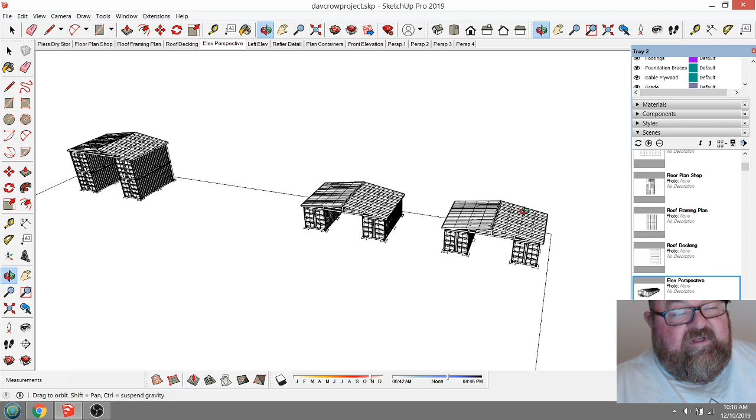And usually the buildings I was helping him with were temporary anyway. So the reason I'm explaining this is because I can't just sell any of these packages and these drawings the way they are for other people, and I'm going to explain that. But I think that's a bad idea in general, because each project really should be designed independently, for that particular project. It's a bad practice to start kind of rubber stamping drawings and design for different projects.

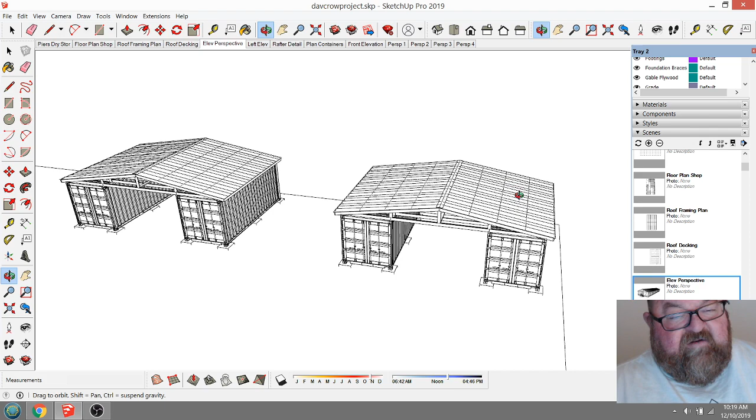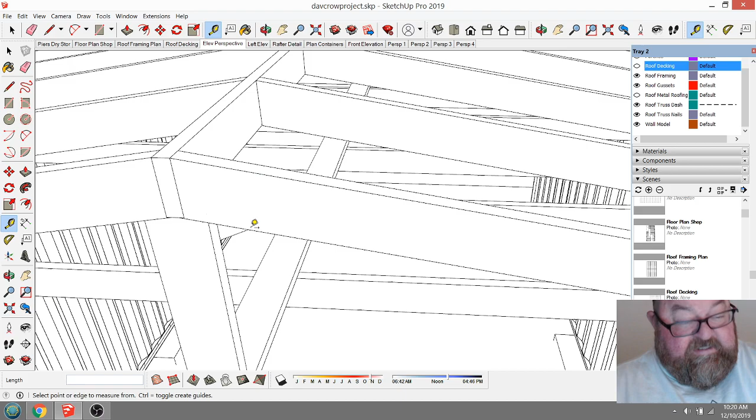And let me go in and turn off my metal roofing and the decking. The Army, on this particular project, would get these containers of 16-foot material. So they didn't have any choice, right? This container would come with so many 2x8s or 2x6s 16 foot long, and that was it. You just had to deal with it. So what I did was I took a 16-foot, I think these are 2x8s or 2x6s. See, that even makes it worse. And I stretched it out as far as it would go. You can see that's 16 foot exactly.

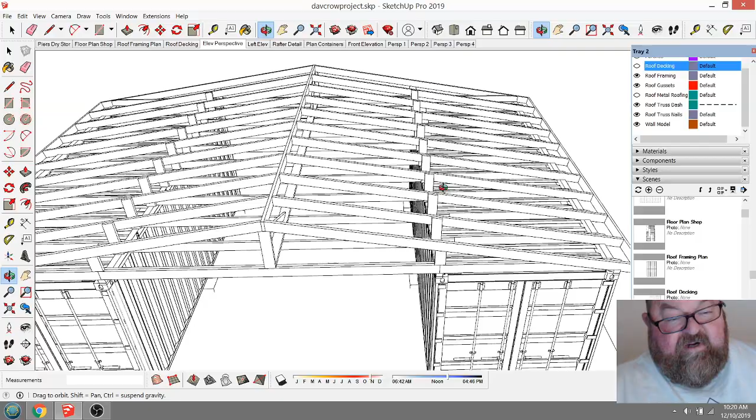So the idea would be that I made the pitch low enough, and I think this is like a 2/12. I made it low enough so that the rafter would be long enough. And the reason I knew I could get by with that is because I had this bearing point midway on each rafter that I could put this little stiff leg in, and I knew then the rafter was really only spanning about half that distance.

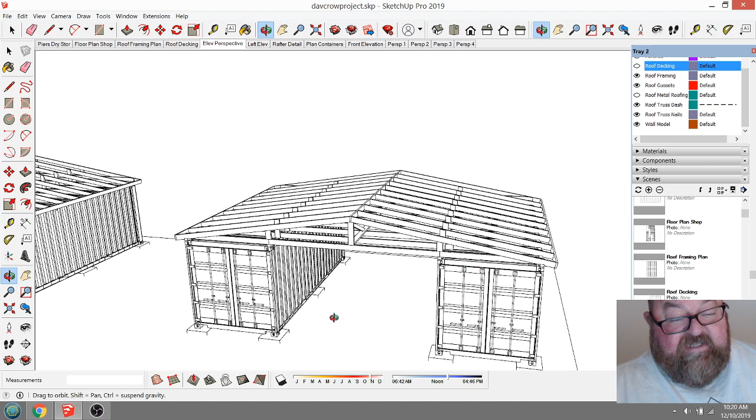But what I didn't like about it was this little wimpy overhang that they had, as a result of only having 16-foot material, because they had to have 14 feet between here to get their trucks, I don't know if they were using Humvees or what, in here to work on them. And that was the whole point of this. So this is not a good design for a civilian. These weren't even good designs for the military. It was out of necessity.

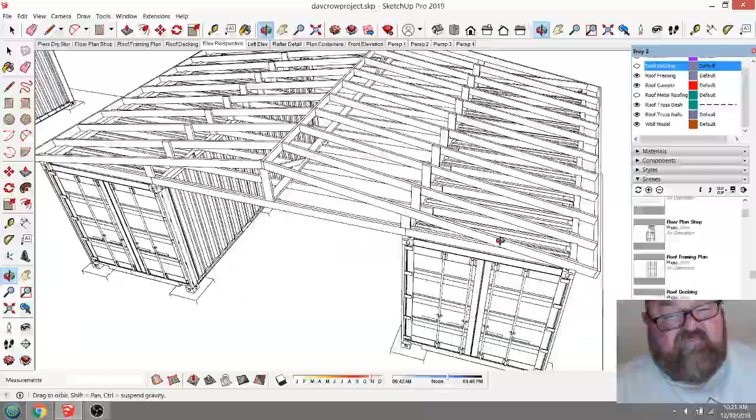Now I think it's a good design for what we had to do, and it worked. But it wouldn't be good for civilian use, and that's the reason I'm not being obstinate by not selling people these designs. I'd be happy to. It's just I have a conscience, and it's just not a good idea.

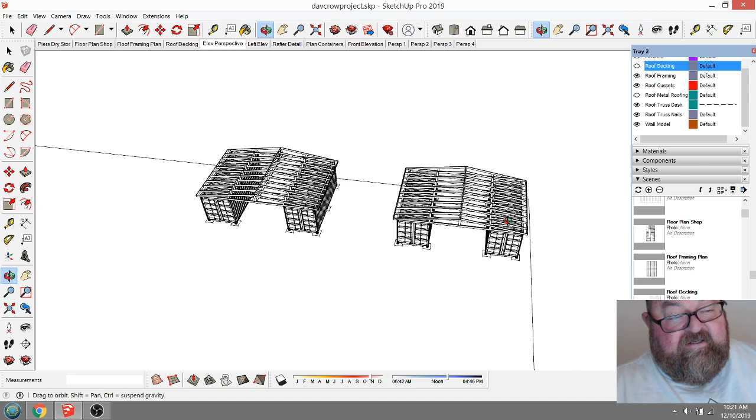I'm going to show you a better design, and this one was really hairy to me. They would stack up two containers, and I'm not sure if this was because they were trying to put a howitzer in there or what. I only got the information I needed to have. These things were top secret missions, and I didn't get any of the top secret information. So whatever they were putting under here was tall, but this is very precarious. And I told Chief, if you ever have a big wind come along, it's going to rip this thing right off.

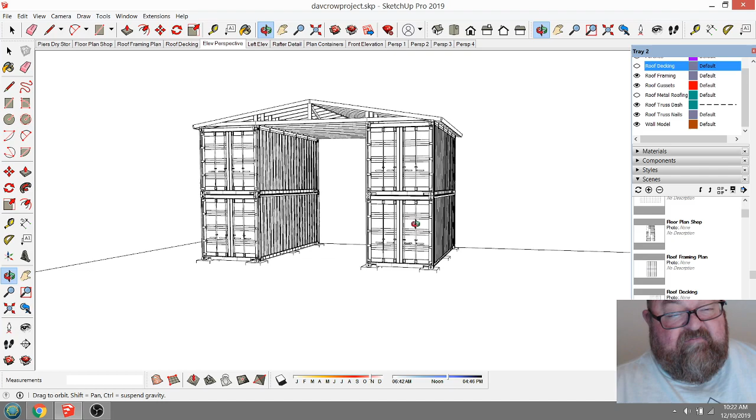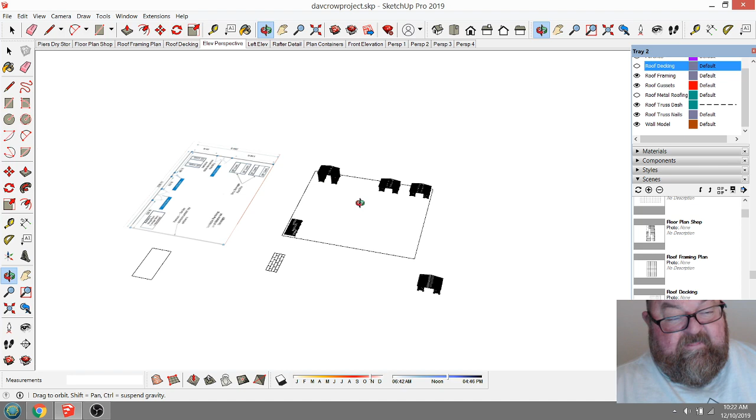And that's the other issue, is that since these were temporary buildings, we had these fastening methods, but I never knew if they were going to be carried out. So I'm basically going to delete all of this. Let me fix this style so you can see better. Which one do I like? There's a certain one.

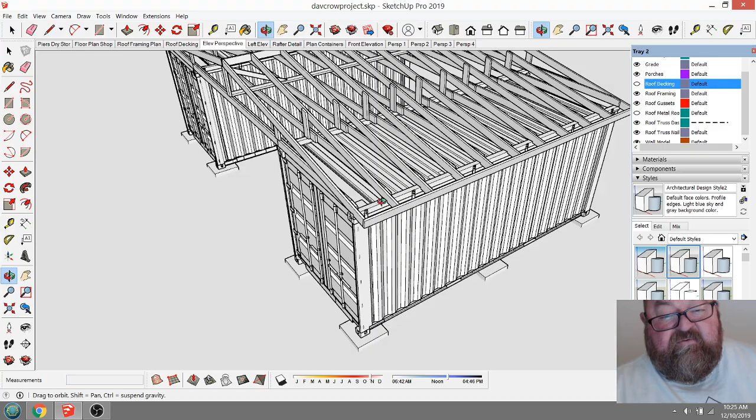I think David said his was not going to be on a slab, but you'll have to have these bearing points, because I still question the load bearing capacity of these walls. These are basically just corrugated steel, and there's no structure on the inside of these. And I know people are going to say, "Oh, they're really strong." Yeah, they are, but you need to have points along here that are load bearing. I would say at least one on a 20-footer. You should have one in the middle. I wouldn't be spanning this.

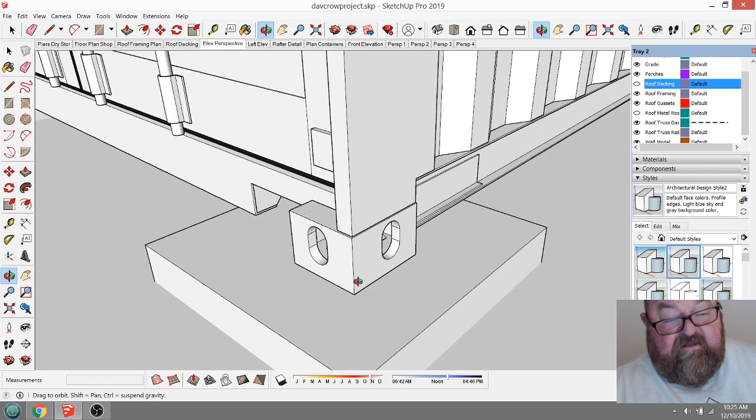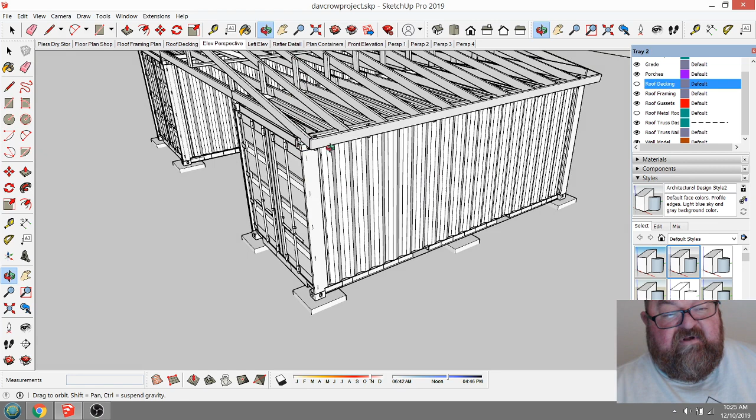The way these are designed is that the corners are what's load bearing. People get this mixed up. See all these locking points? When they're stacked up, the load is transferred to the corners. It's not spread out along the length of it. Of course, the length of it is only carrying what is in its container. When you start stacking these up, it's just the corner that's taking the weight from the one above it. So it's not like this is designed to have 20 containers stacked on top of it.

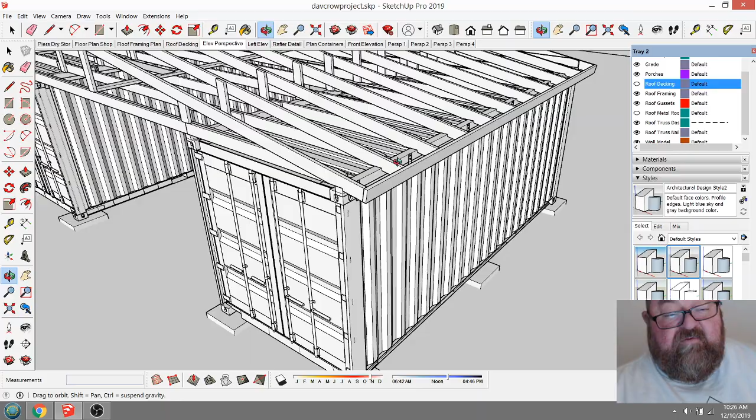This part of it is designed to be stacked, because if you'll notice up here at the top, these stick up. So we're actually creating a load bearing condition when we put this 4x4 on here. Now we're creating a load bearing condition, but we're spreading it out over the length, so it should be fine.

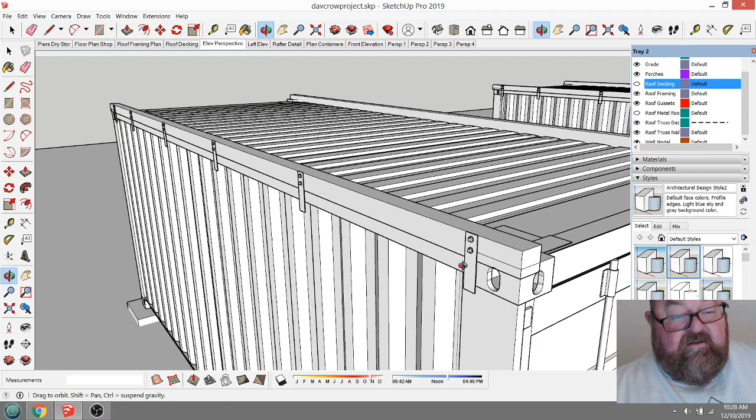So I guess I've done enough talking. So basically this roof is going to go bye-bye. So now we can see how these 4x4s are attached. You just weld on some kind of plate steel. I think this is like a 2-inch strap by 8 inches maybe. Yeah. So you can get some 2-inch plate, flat bar, like 1/8 inch thick, and just cut it into 8-inch pieces, and you'll have your straps.

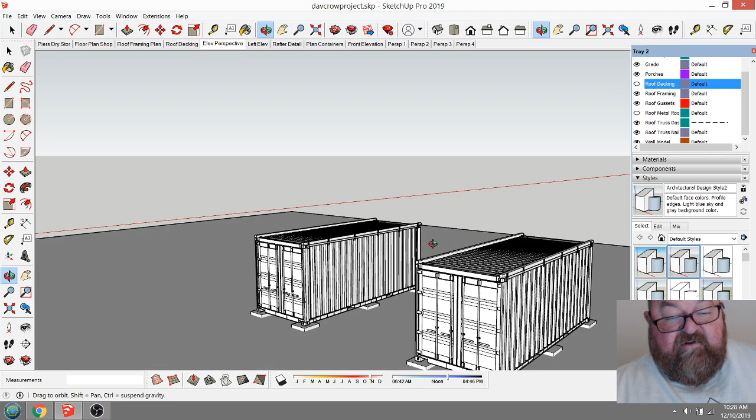Because this is a big airplane. Okay, don't be fooled by this. This roof is acting as a big wing, and if you have a big wing coming along, it's going to be lifting. There's going to be a lot of uplift. Okay, so if this thing's going to fly off, you want the containers attached to the roof as it goes. Maybe it'll land in an upright position somewhere.

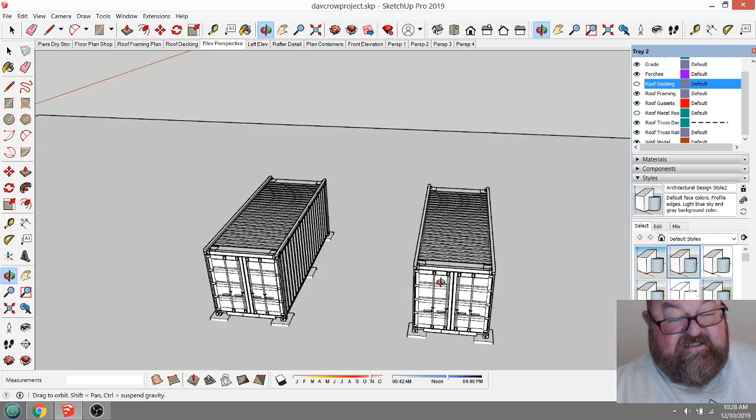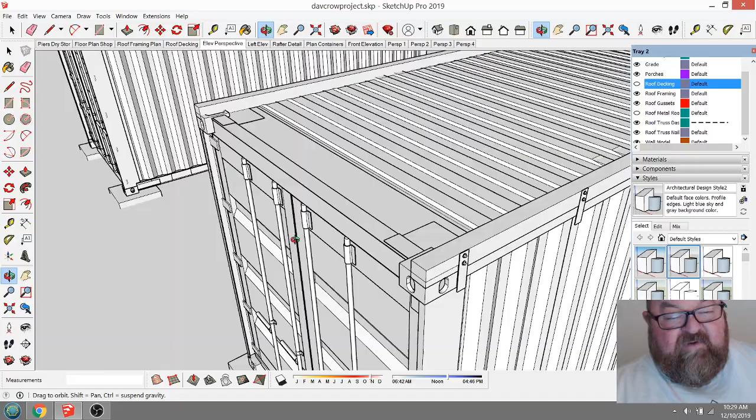But anyway. So we're going to start off with this, and I'm sorry about all the zooming I do, but you have to understand that I have to be able to see. I get all kinds of complaints about this, and I understand, because I watch my videos before I release them, but you have to understand too that I have to be able to see what I'm doing. What I am trying to do is get out of the habit of doing this while I'm talking, so I'll try to do better about that. But I just have to get things situated to where I can work. And this is all about working. The video comes second to me being able to do this efficiently.

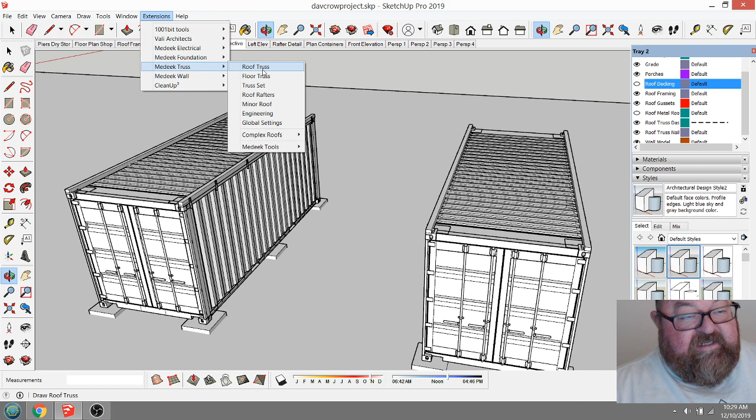So one thing I wanted to introduce in this video, I've used this before, is the Medeek extensions for SketchUp. They have some really nice ones. They have Medeek foundation, truss, and wall extensions. And of course, these truss extensions have actual engineering applied to them. You see a lot of these extensions in SketchUp that are just shortcutting the drawing function for you. Well, these actually have calculations, load-bearing calculations behind them, and these webs are all accurate. You could take this to a truss company and say, build this for me.

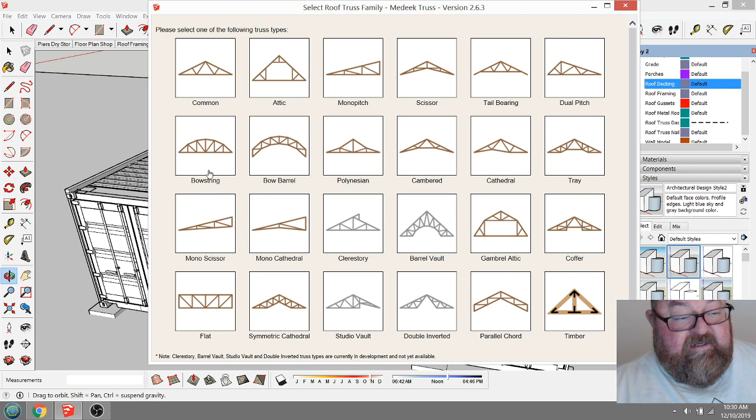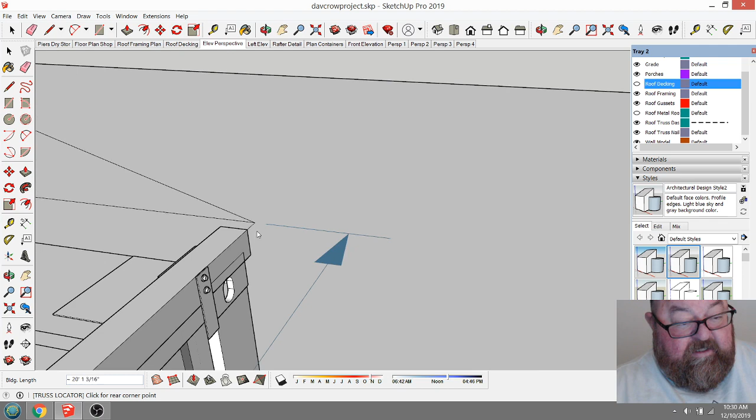So anyway, I'm going to just pick out this typical truss here, and I noticed that they don't have any. One thing I'm going to request is a drop truss, and I'll have to draw it, which is no big deal. But I'll show you that in a second. So I'm going to pick this one, and let's see, click front left corner. So I'm going to go from here over to here, and we're going to go back to here. Now, truss type Fink is fine. Let's see if they do have the drop. I'm just going to do a Fink. I think that is the configuration I was showing you.

Out to out span 30 feet. Now I think I like a 16-inch overhang on this size building. Let's see, top chord pitch. Let's go with a 3. And I meant to ask him about this. I think on this kind of building, you want to kind of keep. Let's see, we're gonna have a 15-foot. Sorry, I'm thinking out loud here. I've got a 30-foot span. That's 8 and 8. That's 16 and 30. That's right. Actually, I have a 15-foot span. So 15 times 3 would be 45 inches. If I leave it at 4, that's 60 inches. So you're looking at basically a little under 4 feet versus 5 feet. And we'll leave it at 4 for now.

That way, let's see. He said he was going to use metal though. Let's try to save him a little money. And if you don't like this, Dave, I can fix it. But you can easily do a metal roof at 3/12. I just think keeping the roof down. You wouldn't want to do like a 12/12 pitch. You don't want the roof area to be larger than the building area. That's kind of a general rule of thumb I have.

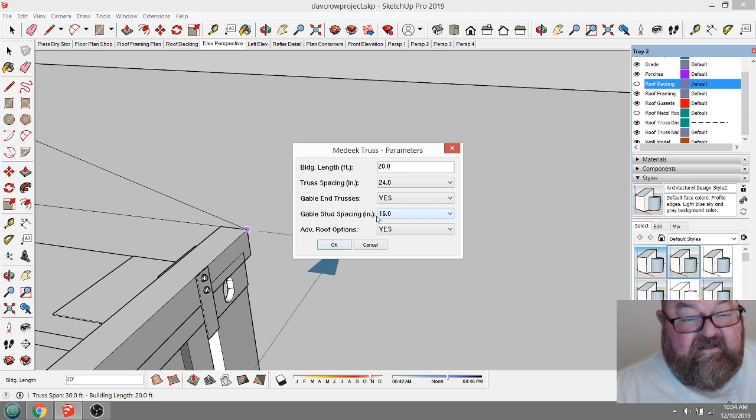The reason I want these gable end studs, and I'll show you this in a second, to be on 16-inch centers is because I'm going to suggest maybe doing some board and batten in the gable instead of lap siding, and those 16-inch centers will work out better for that. So let's see what kind of advanced.

This is on these outlookers. I like to actually drop the truss on the end, and I'll show you if they don't have that option. I'll just manually do it. Roof sheeting, let's go ahead and say yes. 7/16, good. OSB. Gable wall sheeting, yes. Wall sheeting material, OSB. Subfascia, yes.

Drop. Fascia width, yes. This is one thing about Medeek, is that they actually know how things are built. And I can tell by going through all these specs. 7/16 OSB, all of the stuff is common to modern building construction, and it's very refreshing to see that. Rake board, yes. Gable overhang 16.

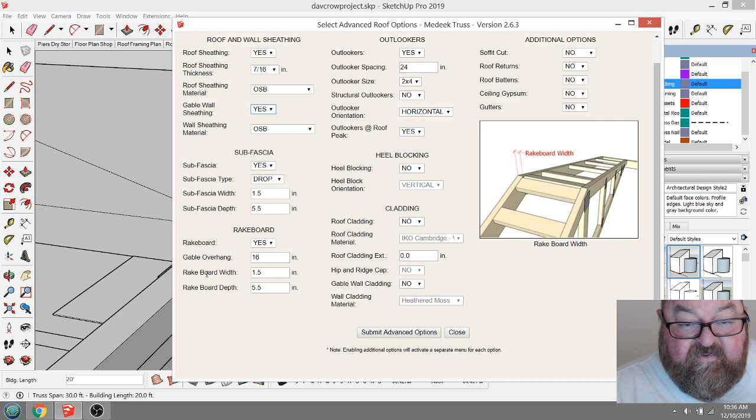We call it the barge rafter. The reason we call what they're calling the rake board a barge rafter is because it's the rafter that hangs over out past the house line, and it's just like a subfascia. It's akin. It really is part of the subfascia system. It's not like an exposed member. It can be, but it's not typically exposed. It's usually covered up with a fascia board.

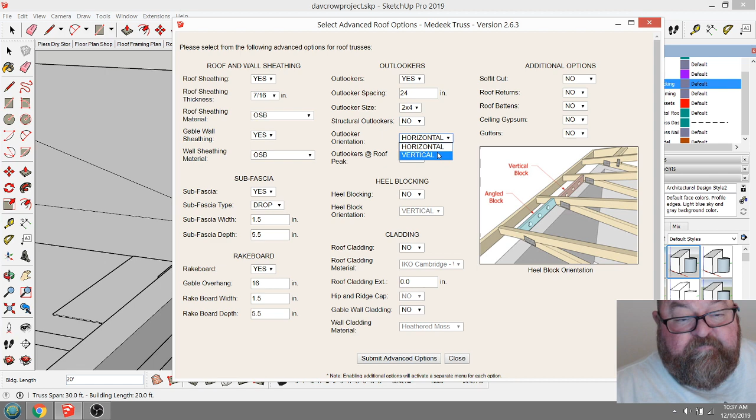Outlookers, yes. Yeah, see, these guys know what they're doing. Horizontal or vertical. I've done this both ways, where you can lay the outlookers. They're better like this, vertical, instead of horizontal. Horizontal would be flat. I want them vertical. If this doesn't work out, we can always change it.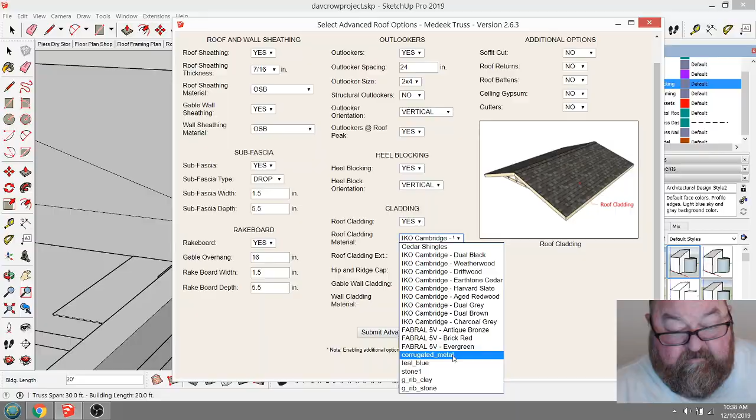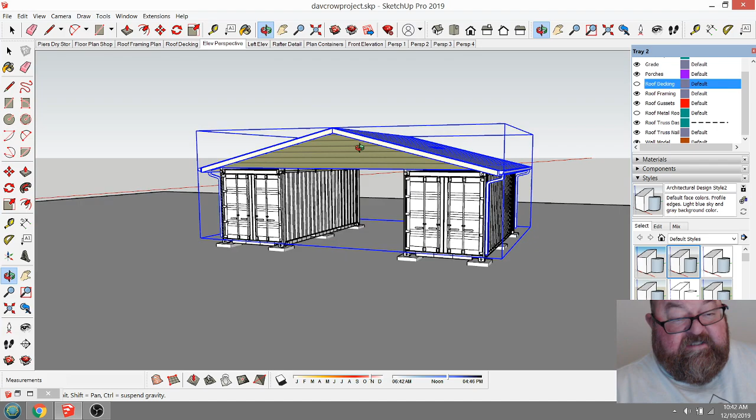Cladding, roof cladding, yes. Material, let's just call for corrugated metal. There we go. I'm not sure if he'll have gutters or not, but we'll leave them there and then go from there. Now, what I really wish I'd done is left that, because I really think this is kind of a paint lap siding in the gable like that. And I'm surprised, I thought we had a soffit. Let's go back and check. I think what I'm going to do is take off the siding.

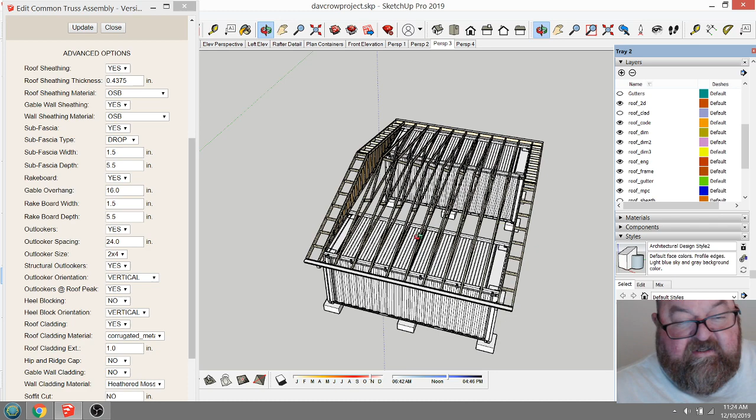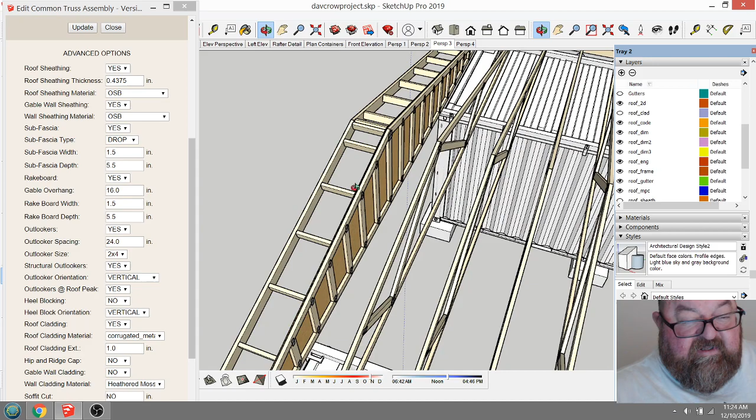Okay, so I finally got my layers worked out. I had to become familiar with how Medeek does their layers, and so I kind of got that figured out. And one thing I wanted to show you, and I appreciate this about them, they have these options with these soffit outlookers blocking. There's two different ways to do this, and there's one way I really like to do it, and I'm going to show you. This is the way a lot of people do them.

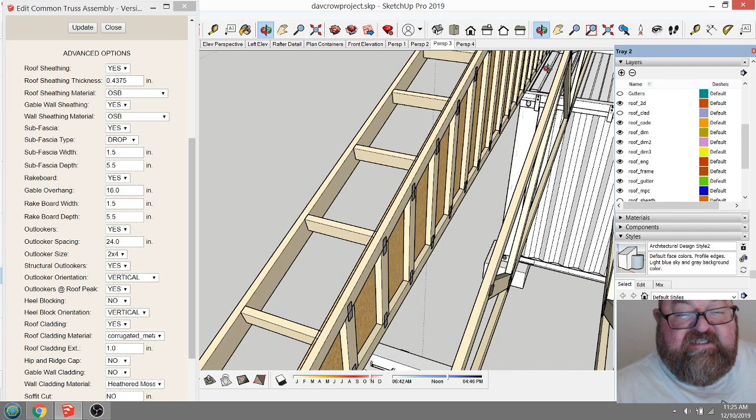They will have this house line truss, and it just occurred to me that is going to need to be a structural truss. The best thing to do here is probably, let me think about this for a second. Typically, what I call a house line truss is sitting on top of a wall all the way. It's not load bearing. And so we can get by with just these vertical members for nailing your sheeting and siding onto.

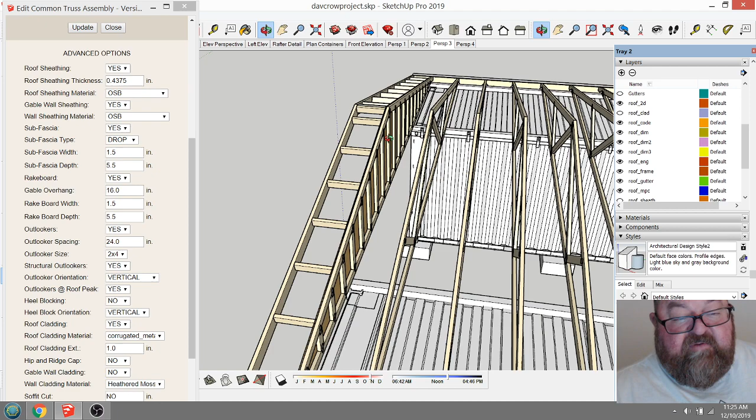Well, in this case, it's got this span here, and this may seem like overkill, but we may want to just put a truss up beside it. I'll look into that and see what the best way to do that is, and get back with you, David, on that.

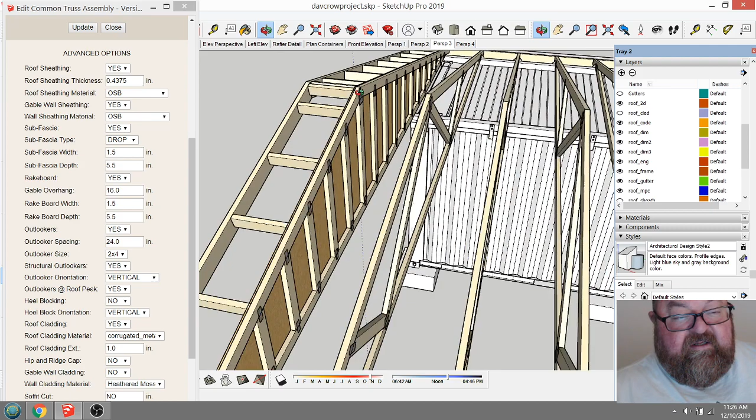But the way I like to do these is actually drop this truss. With this method, this truss would be at the same height as these. They basically are built the same. They just don't have the same structural webbing that distributes the load across the truss, the bottom chord there. They basically have vertical members for nailing siding onto, because they're not load bearing across the length. They're usually just sitting on top of a wall.

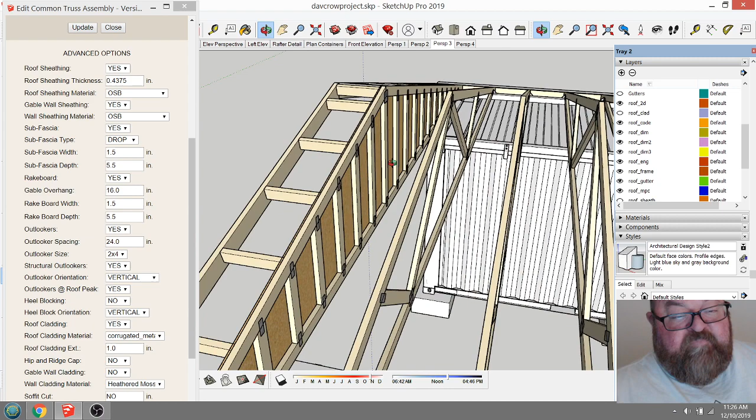But the way I like to do it is I actually have what I call a drop truss put here, and it's basically 3.5 inches shorter. And thankfully, where is it here? We have, and I figured it out because I went back to structural outlookers.

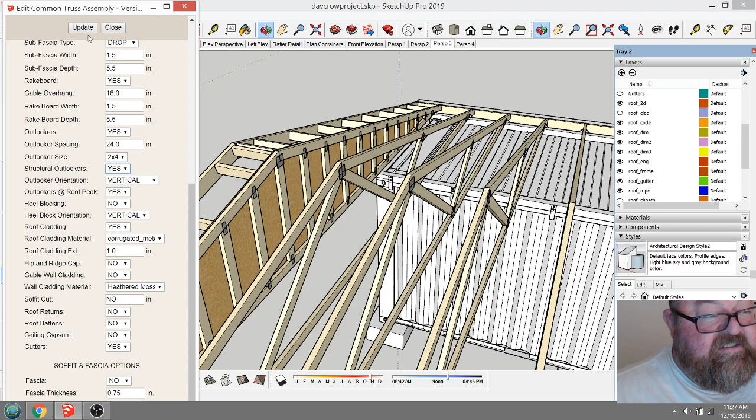Yes. So if you say yes, what that does, and I'll update this, it actually drops the truss. I don't know if you noticed that. It actually drops the truss like it would be, and then that allows you to run your, I keep wanting to say outriggers because it's what we used to call them, these lookouts, these blocks, they run from here out to here, and that's exceptionally strong, okay?

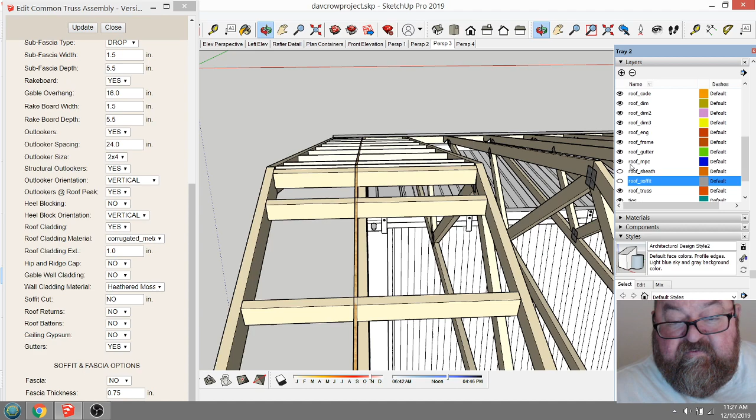Because now they're sitting on top of this truss. They're not just toe-nailed into it. And they're cantilevered back here to this truss. So by way of the roof decking sitting on top of that, where's our roof decking, roof sheeting? Here we go. You see, there's really no way that can droop down. And this really comes into play when you have a large overhang, like a 2-foot overhang.

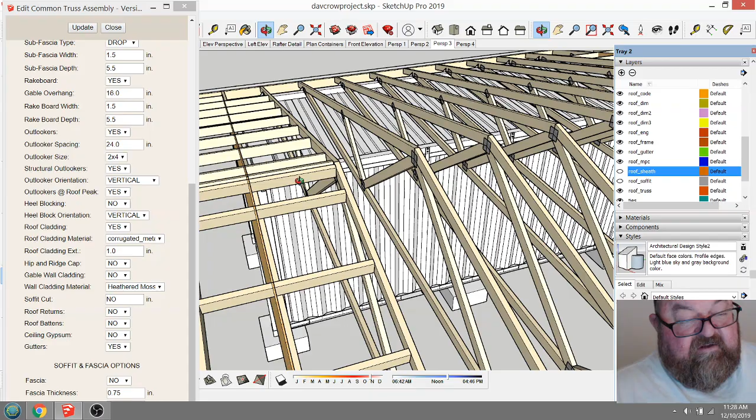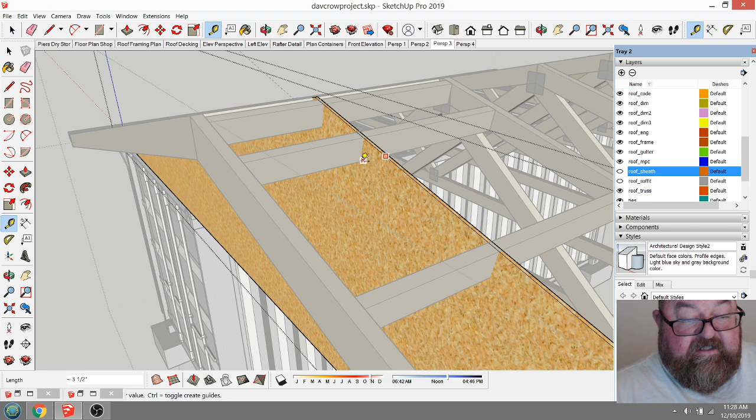Now, I am surprised when you say yes on the structural lookouts, different parts of the country have different terminology, then the sheeting should be down in that case. So in that case, the sheeting would be down here underneath like that. So I may have to fix that, or I'll just leave it alone, and you understand that the sheeting just goes up to the bottom of the lookouts there. It would be cut to where it just goes up to here. So that's your two options.

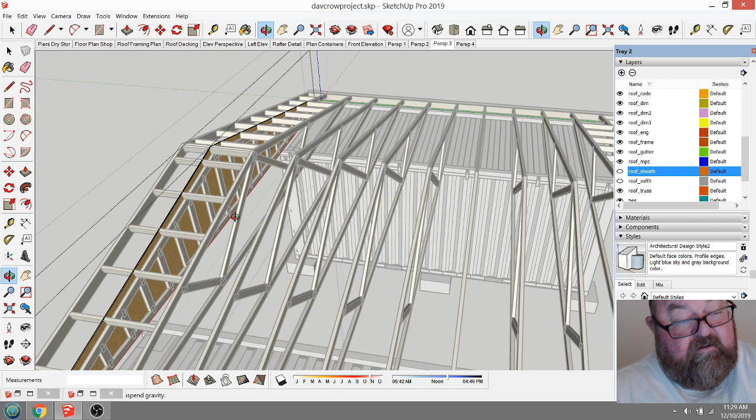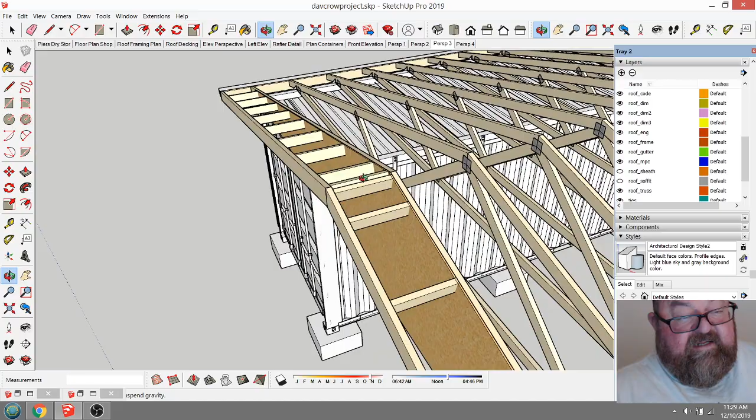The, I guess you could call it cheaper, faster way is if I just undid that. Go back to see. You really can't tell that it just popped up, but the truss just popped back up to be even with the tops of these, and then these blocks are cut off, and you can see that doesn't allow as much structural.

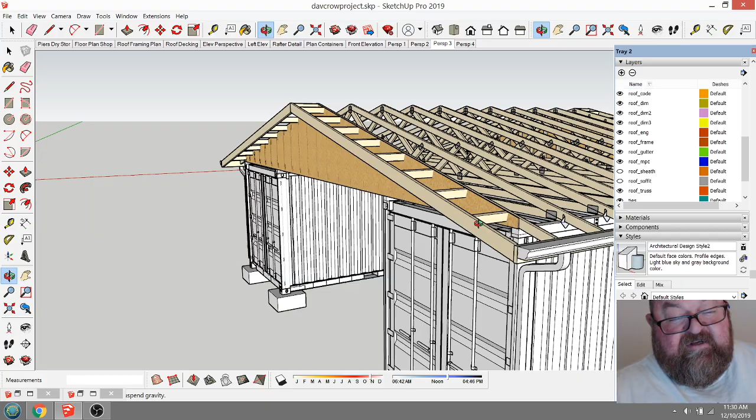This is basically just hanging out here now, and you don't think it's much, but if you drive down the road and look at all the houses that have drooping soffits, overhangs on the end, you'll see what I'm talking about. You'll see these sag even along the length, especially if these get kind of long, like 16, 18 feet long. You'll see a sag in the middle of this because there's really nothing holding it up.

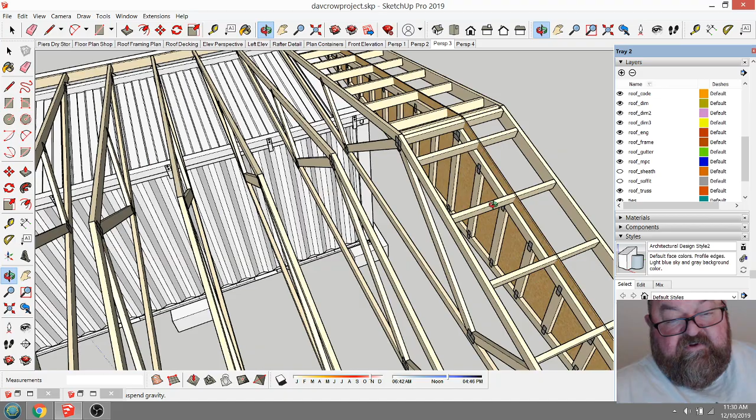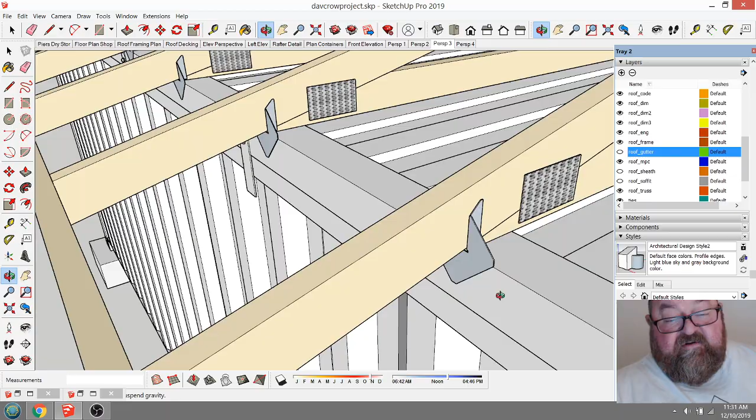And so probably what I'm going to do is go back. Let's see if I can redo that. There we go. Thank you, redo. And that's the way I'm going to suggest to do it. In the long run, it's up to you how strong you want your overhangs. And of course, to tie these trusses off to this 4x4, you would have what we call a hurricane tie. It's just a metal tie, typically Simpson makes these, and there's different types, that ties your truss mechanically down to this 4x4 here.

Now, one thing this is not showing, and I need to go back and look, is there should be a purlin down the middle. And I'm just going to go ahead and show you what it looks like here. I'm just going to draw, let's see, what is that? And then we'll pull it up 1.5 inches.

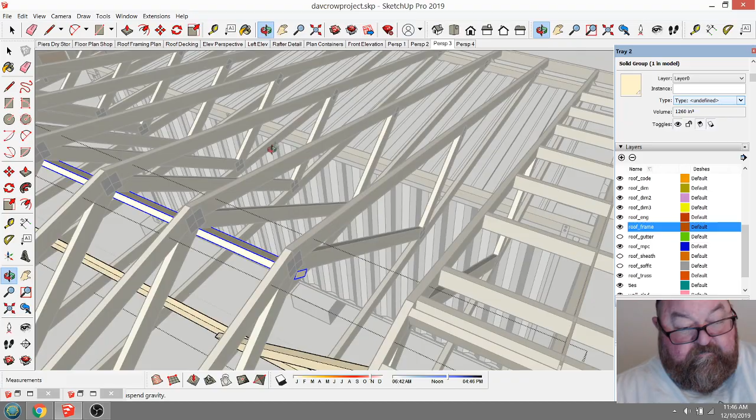Yeah, that'll work. So there you go. You can see how having to draw things individually takes so much time. I was able to create this whole roof system in probably half the time it took me to draw that bracing. What that does is it gives your roof system lateral bracing this way.

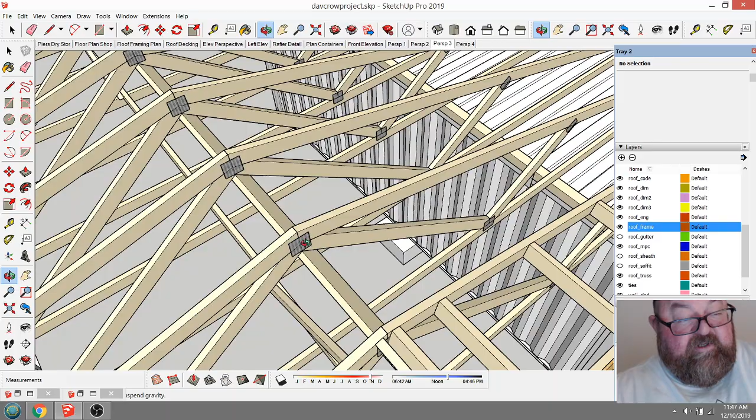When you're setting your trusses, you'll have this brace laid out on 24-inch centers where your trusses go, and then you'll nail up through here into the bottom of your truss, so it'll help you keep the trusses on layout while you're installing them, but then it'll be a permanent brace also, and that just makes your roof really strong and keeps it from having this lateral movement.

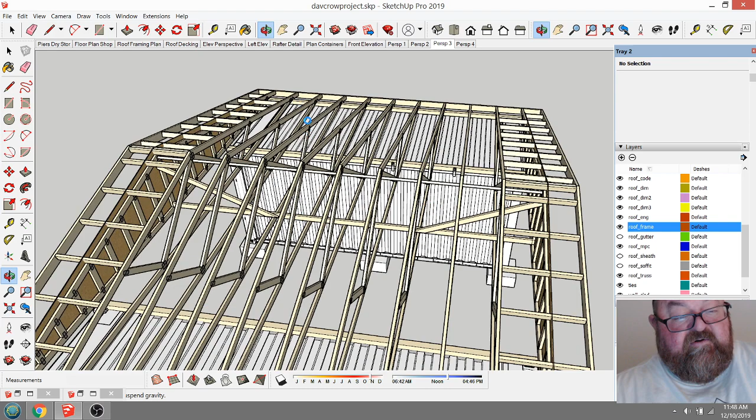I've actually seen trusses fall over and they just lay over like dominoes, and that's because they were insufficiently braced and the wind came up, and of course they were taller trusses that caught the wind, and they all laid over, and it was a mess, because when you raise them back up, the nails would be out of this plate, so you'd have to pull all the nails out and reset them. So that's what I would recommend on the trusses.

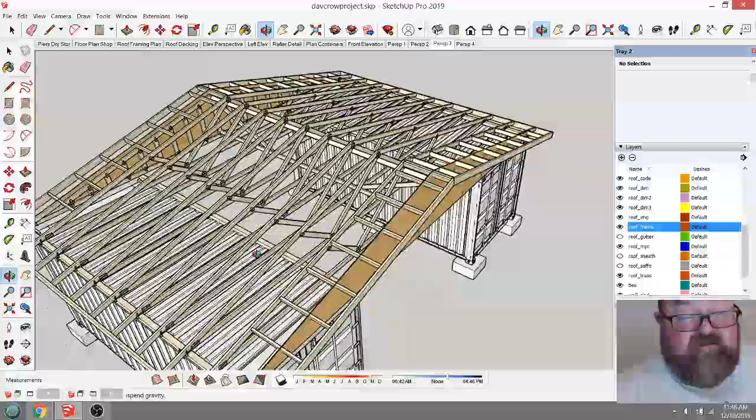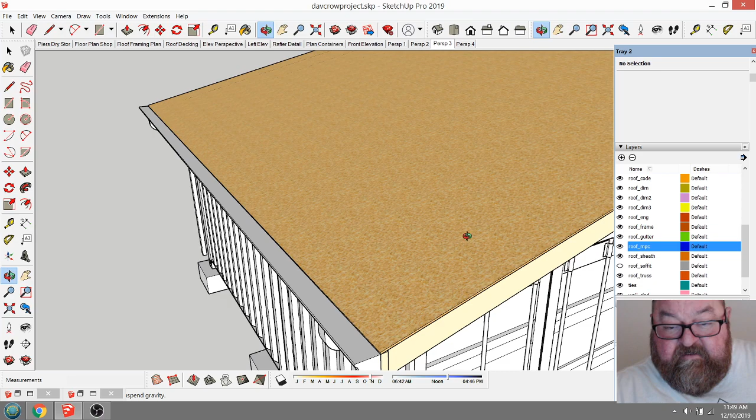And then, let's turn our layers back on. We got our gutters, and I'm not sure if he needs the gutters, but that would be gutters. And then our roof sheathing. And of course, that's just 4x8 sheets. I wish I had deleted my roof sheathing because I actually show the pieces. Just like that. See, that'll give you that continuous air gap at the top you need for your ventilation. So there we go.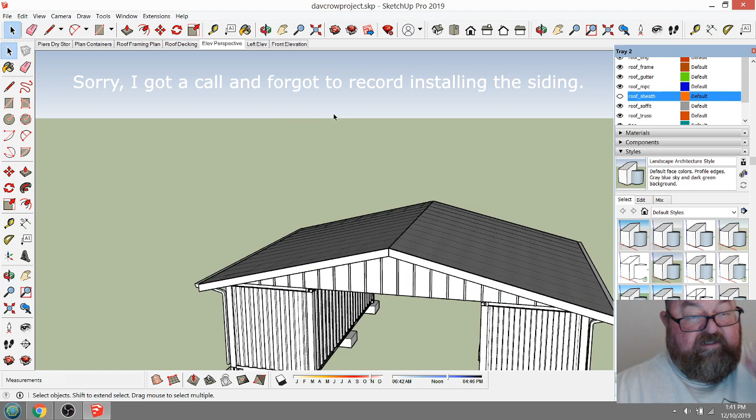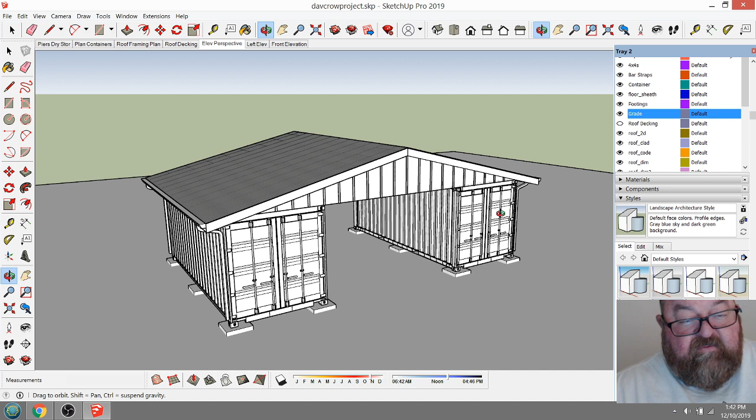So what I think I'm going to do is send this to David and see what he thinks, and I'll send it to him in several different ways. I'll show him how he can get online and see this, and I'll also send him some paper drawings that he could print out. Okay, well, this first video was probably long, but I wanted to knock out most of the drawing part of it, and then I will get some updates from David on how he wants to proceed with this, and part 2 will be finishing it up, and I'll show you how I lay out the drawings.